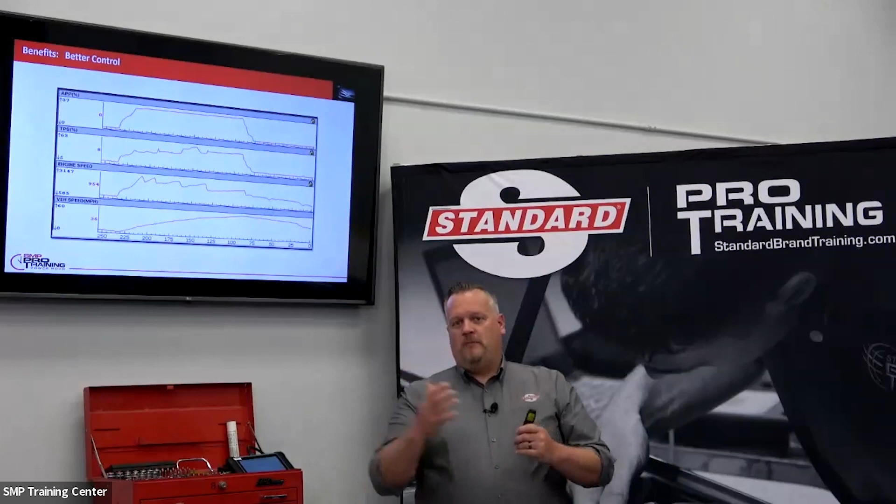One of the benefits here is actually better control of the vehicle. I've got a Buick Encore here with me. We're going to be looking at a case study and diagnosing it here. But engineers for years and years have wanted to get better control of the vehicle, and one method here is through electronic throttle control.

If we look at the scan data up on the screen here, you'll see the top line is the APP, the accelerator pedal position sensor. This is the driver's input, the driver request. If you look at that scan data, you can see that it plateaus, it goes to 100%. This means the driver is, for all intents and purposes, flooring it, pushing their foot all the way to the floor. They want to go fast.

The second line shows the actual throttle position. On old mechanical vehicles, if your foot was to the floor, it meant the throttle blade was wide open. But with today's drive-by-wire systems, the PCM or control module is ultimately in control and gradually ramps up, giving the engine as much air as it needs there. That's just one example of better control.

Another example here is component reduction. Think specifically about cruise control. We no longer have to have a standalone servo, we don't need cables - it's really kind of a thing in the past. Engineers were able to reduce the amount of components required on a vehicle by incorporating it all into the electronic throttle control system.

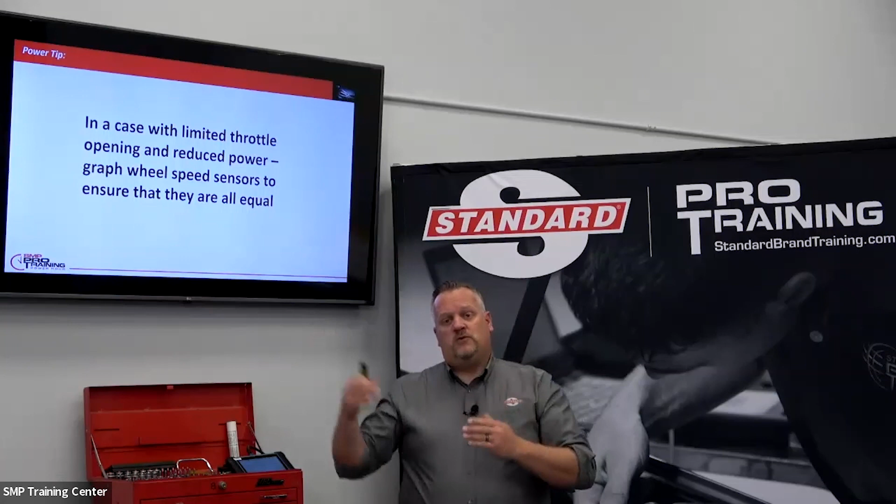So if you run into a situation like this, graph out and monitor all four wheel speed sensors. The examples I've seen, one wheel speed sensor will drop out, and the PCM thinks that wheel is slipping or locked up or lagging behind. So it's going to reduce the amount of engine torque via the throttle command and reduce the power to the wheels. Make sure that you're verifying that all four wheel speed sensors are in fact producing the same type of output. Another benefit here is reducing emissions.

That's all the rage, right? And it has been, at least in my 40 plus years of life here. Manufacturers are continuing to look at how to clean up the tailpipe emissions through catalytic converters.

But now with electronic throttle control, engineers can help get that catalytic converter lit off and working properly much quicker by controlling or choking off the airflow. Remember in the old days of carbureted vehicles, there was a choke device, which limited the amount of airflow and created a different air-fuel mixture. Engineers are doing a lot of the same stuff now with electronic throttle control. They can control the amount of fuel going to the engine via the injectors, but they can also choke off and control the engine via the electronic throttle control to help that catalytic converter work much earlier in the drive cycle and clean up that tailpipe.

Then another benefit here is eliminating pumping losses. If you're not familiar with the term, let me explain. In a four-stroke engine, the pistons go up and down throughout all four strokes. Think about the intake stroke - the piston starts at the top and is drawn down by the crankshaft.

As it's coming down, it's pulling air in through the intake valve, drawing it in to fill the cylinder. The air is going to produce a vacuum because in most cases we've got a throttle blade at the beginning of the system, which is going to be closed in many cases, and it's going to create a vacuum. This vacuum actually reduces horsepower, or creates a drag on the crankshaft, resulting in what's referred to as a pumping loss - any type of inefficiency affecting the pumping of the engine. That's why diesel engines are much more efficient in many aspects, because a lot of them don't have throttle plates. Some newer ones do for emissions purposes, but they default to the open position. So those engines breathe much freer and easier due to no pumping losses.

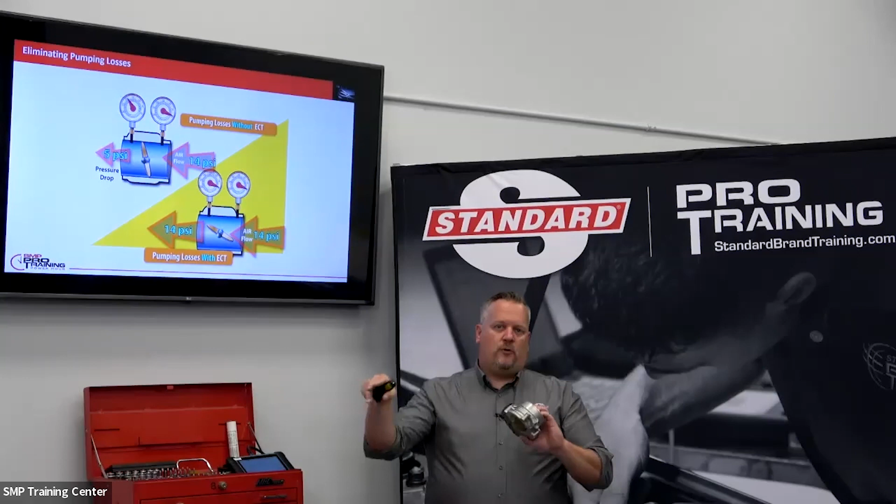So where am I going with that? Engineers today with electronic throttle control can use it to their advantage. Recently I was driving a 2.7 liter Chevy Silverado, a full-size truck with a little four-cylinder. Of course it's got a turbo, VVT, a lot of different technologies incorporated into it. It was amazing to see that as the truck was driving at a steady speed down the road at 55 miles an hour, the throttle blade was commanded almost completely open. The engine RPM was being controlled via cam timing, ignition timing, injection amount, and all these other technologies in sync with the electronic throttle control system to help that vehicle breathe easy and run as efficiently as possible. We couldn't do this with an old mechanical throttle cable style system.

Here's another one that, for those of you working on cars in the 90s, this was commonly referred to in the shops I worked at as morning sickness. This is a scenario with a customer, predominantly with a GM 4.3 liter - think of an Astro, Chevy S10, Blazer, something along those lines. They would come in and say, first thing in the morning, man, I really got to stomp on the throttle to get the vehicle to move. As the day goes on, it seems to get better.

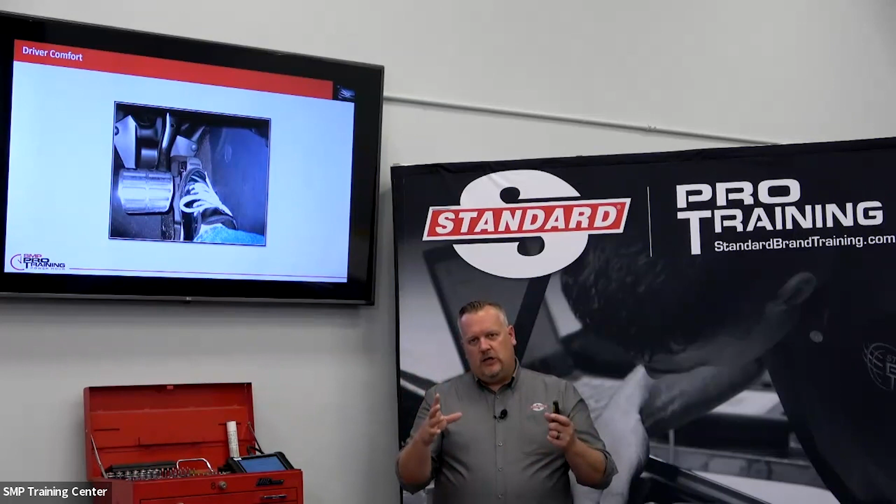Well, that was because of carbon buildup on the throttle blade inside the throttle body itself. After the vehicle sat all night, that carbon would harden up. So the driver would press on the throttle - and it's pulling on a cable, a mechanical device at this point - they'd have to put in extra effort to break that thing free. Now as the engine warmed up and the day went on, that carbon would turn into somewhat of a goo, or more of a liquid form, and it would be much easier to actuate the throttle. Well, today's electronic drive-by-wire systems have the driver simply pressing against a spring, so they're not doing a whole lot of mechanical work. The driver experience is much more comfortable today than it was previously.

Another one is, as we look at newer technologies, they've been significantly enabled due to electronic throttle control here.

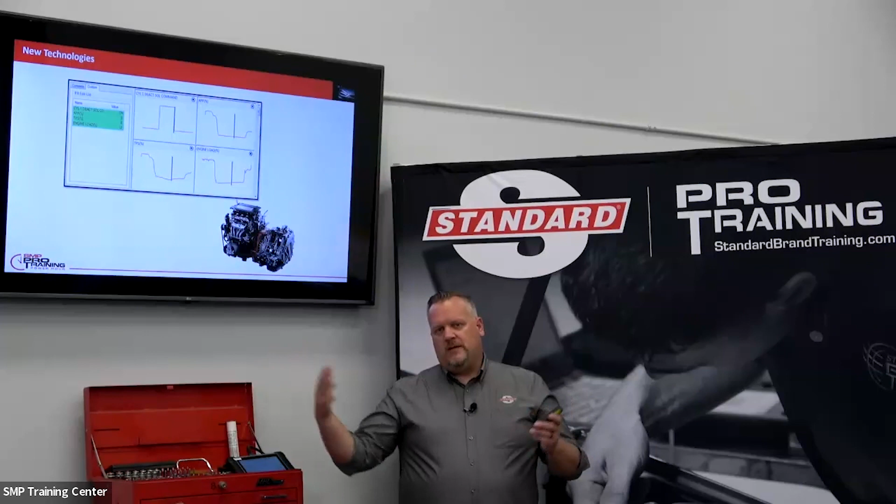So if you look at the scan data displayed on the screen, you're going to see an example of a vehicle with displacement on demand. You may remember some of the old Cadillac systems that would drop different cylinders strategically, and that was not a raging success. Today's vehicles quite often go from, say, 8 cylinders to 4 cylinders with displacement on demand. With electronic throttle control, the PCM knows when it's going to disable these multiple cylinders, and it compensates for the adjustment in airflow via the electronic throttle control system. It really helps complement that, and if you've driven any of those modern vehicles with a displacement on demand system, it's really a seamless transition, whereas it wasn't necessarily so seamless in the older Cadillac test phases.

We've also got an image of a hybrid engine there. Really, hybrid technology would not be possible without the use of electronic throttle control. It's very seamless in many cases when it goes from electric power to internal combustion engine and transforms back and forth. With electronic throttle control, the driver presses on an input device, the APP, and makes the request, but the PCM is ultimately controlling the internal combustion engine torque output via the throttle body. So it's really been a huge motivating factor for a lot of newer technologies.

So let's look at the system as a whole. We've got the accelerator pedal position here, and this is the driver input - how fast do you want to go? And maybe a dangerous question to ask some people, like my assistant, Ricky Bobby, here in the studio today. But this is the input from the driver, pressing down on the throttle, making the request to the control module.

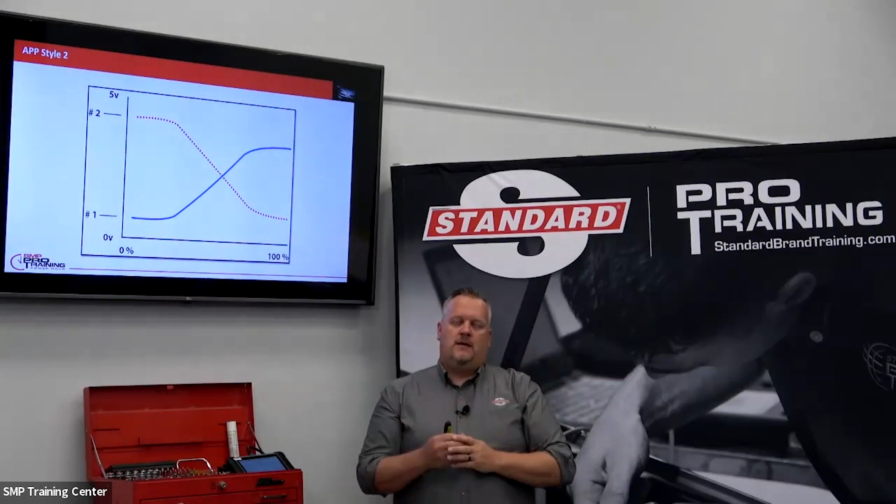I verified this on a 2023 Chevy Traverse just last week, and yesterday on a Nissan Pathfinder, still really using the same type of strategy, many cases on the APP as well as on the TP sensors.

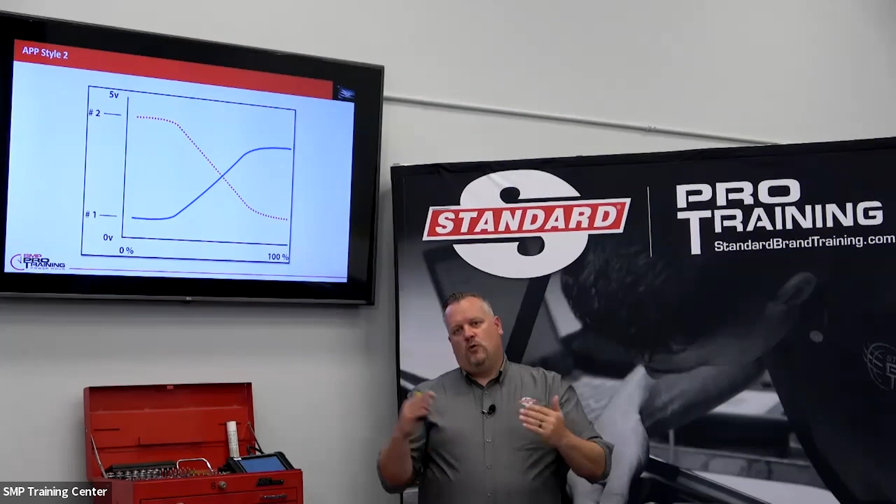Now, it's not always going to be this way, so I always ask you to understand your own known good and look up service information. Manufacturers do a fantastic job of giving you the specs as to what these should look like, but this is just a casual observation through my own personal experiences.

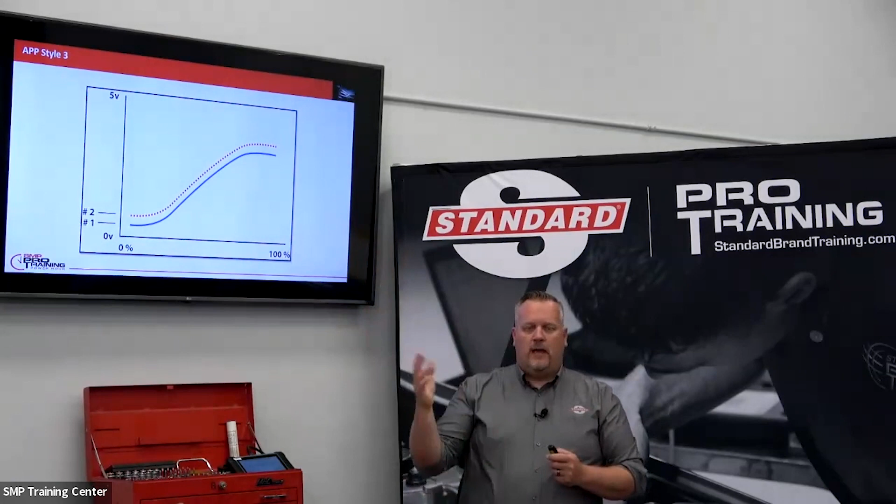There is another style, such as this one, in which both signals start low and work their way high as we sweep through the throttle. But notice how they're offset. Again, the control module or the engineers need to know these are not shorted together, so they're both starting low and working their way high, just offset from each other.

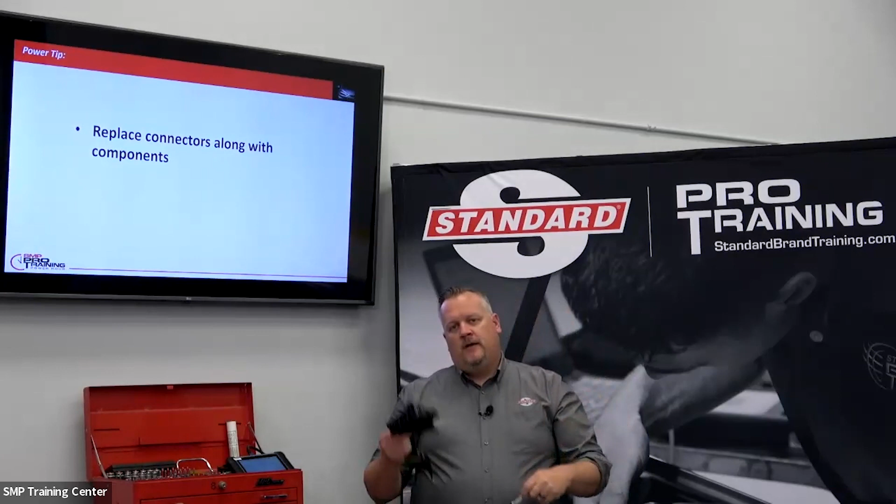That brings me to another little power tip. If you're going to replace one of these components, it's very important to pay special attention to the electrical connector that goes with it. If I'm climbing underneath the dash to replace this thing, in many cases I'm going to always recommend to the customer that we're replacing the connector along with it.

These things are inside the vehicle, but think about how close they are to the driver's feet. If you're in a rainy situation or in the north country where people are tromping through snow, remember they're putting their feet here. The floor is going to be wet, and you're going to have a lot of humidity in this area.

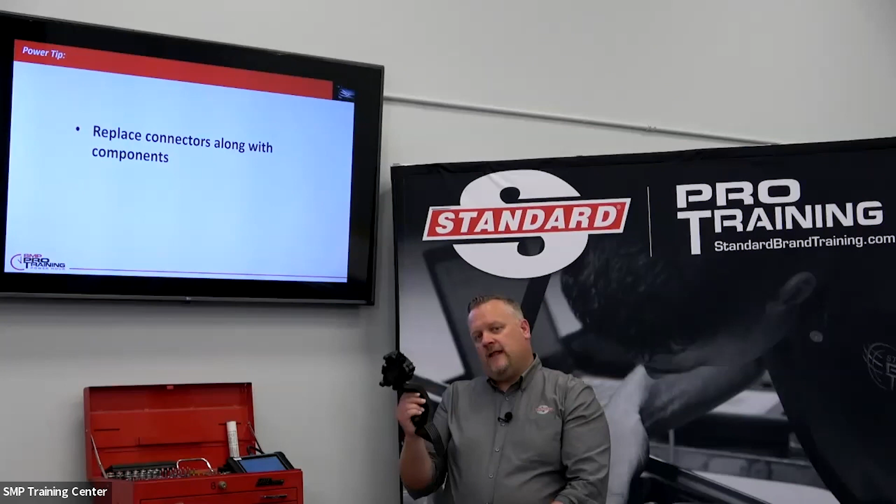Quite often we'll see terminal tension get relaxed or even what's referred to as fretting. Sometimes even a technician unplugging and plugging this back in will create a different type of connection and somehow actually fix the condition. We hate to fix a customer's car by simply unplugging and plugging something in. We want to make sure it's going to be a fix that lasts.

So if we're going to replace the APP, many times I'm going to recommend replacing the connector along with it. Otherwise, I'm going to recommend using a product such as this. You might be familiar with Stabilant 22A. This stuff is definitely worth its weight in gold, literally, but it's a contact enhancer.

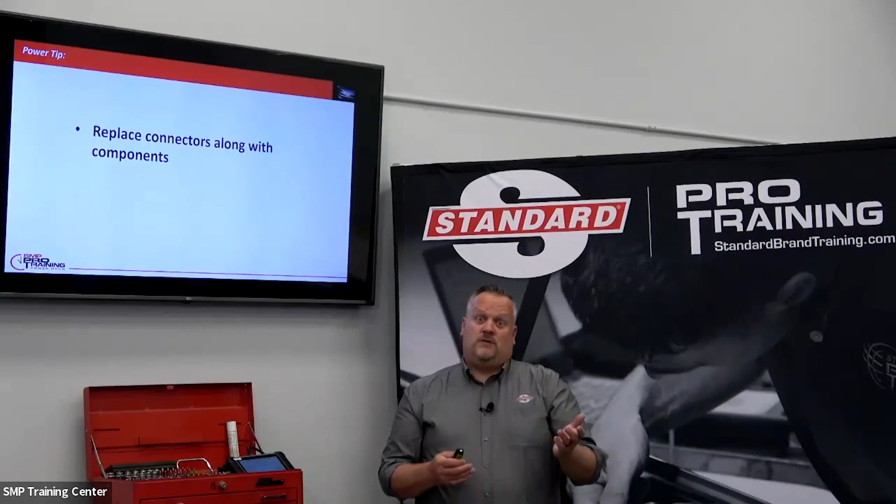If I can't get a connector or the customer doesn't agree to it, many times I'm going to put a few drops of the contact enhancer on here to help make a better connection. We certainly don't want to sell a customer a component and have them come back a week or a month later saying it's doing the same thing again. Never a good scenario. Now, if we look at the throttle body assembly itself, we've got a reversible brush DC motor.

Our engineering test facility is on the other side of the wall from the studio here. I walked out and grabbed a couple samples that they had sitting out there, that they were installing on vehicles and doing some tests with.

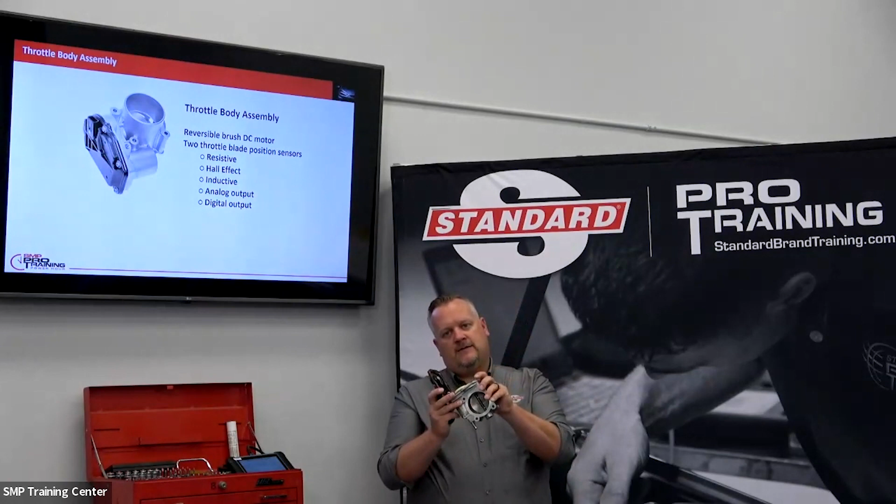If I remove the gear here, there's a little reversible DC motor. Power and ground are applied to move it one direction, and it's reversed via the control module to drive it in the other direction. Then there's a set of gears here, kind of a gear reduction setup, and the gears drive and go to the throttle blade itself. The throttle blade itself has a spring acting on it to return it back to the default position.

Inside, and you'll see actually in the cover here, this is a new Hall effect design TPS sensor. So there's multiple throttle position sensors here. Doesn't necessarily look like it, but there's different magnets inside of the throttle shaft, acting across the Hall effect sensor, resulting in the output to the control module.

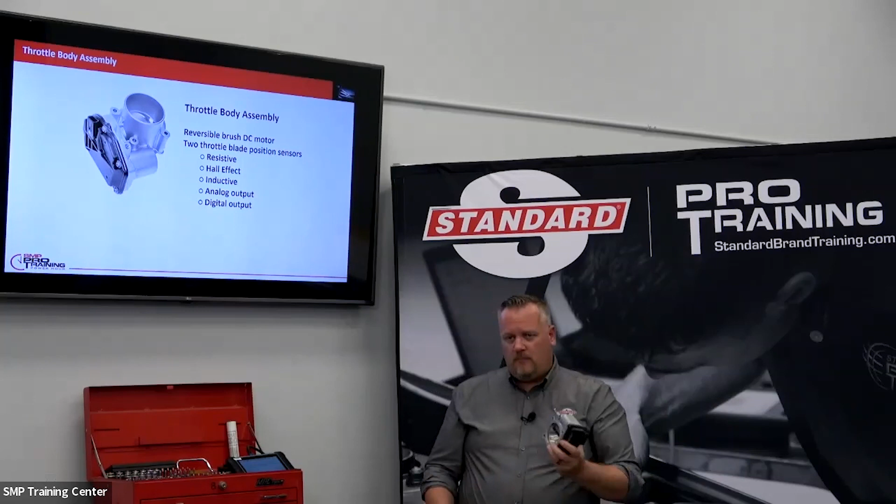If we look at these, we'll see kind of the default position. And if you've ever touched one of these or opened them up, you'll notice it doesn't just always go to the closed position - it's going to default to about the 7 to 12 degree range there.

If you drove a vehicle with a throttle body unplugged, it's going to run about 1,500 to 2,000 RPM. In some cases, in the name of research, I've even driven a vehicle around the block with a throttle body unplugged, and it drove surprisingly well because we're getting some air through here, but the RPMs can be controlled via cam timing, turbo, injection quantity, amount, etc. So we're getting some accelerations and decelerations, even though the throttle body was left in its original 7 to 12 degree range there.

So now if we start the vehicle up and the vehicle is idling, the control module is going to adjust the placement of the blade. And it's not always going to be the same - there's going to be different loads. Let's say AC system is on, it's a hot day, it's a cold day, whatever - we're going to see some changes there. So it's going to be continuously adjusting it.

That brings up another point here - we need to make sure that the throttle body is clean, and we also need to make sure that the idle position has been properly learned. I'll talk about some tips on that in a little bit, but the idle position is crucial to good drivability or customer concern.

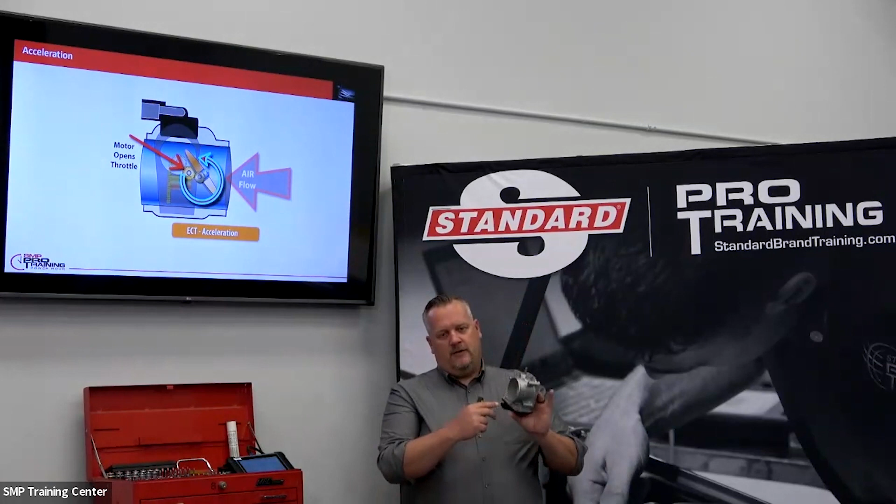Now if the vehicle is going to accelerate, the command is going to be given, power and ground will be applied to that motor. It's going to drive the throttle blade open in one direction, and then obviously it's going to go in the other direction to close it.

That brings me up another tip here - you can see I'm actuating or moving the throttle blade here myself. Obviously this is in my hand, it's not on the vehicle. That's one of my cautionary tales here to you as a technician. When you're working on these things, it's tempting to just do it on the vehicle. I'm always going to recommend to remove it from the vehicle and do any actuation or any cleaning of it.

For one, if you get it off the vehicle, you can access the backside, clean it much better. It's never really recommended to spray cleaner into here because it could wick through the shaft, actually short out the motor or the sensors inside of here. So it's good practice to remove it from the vehicle.

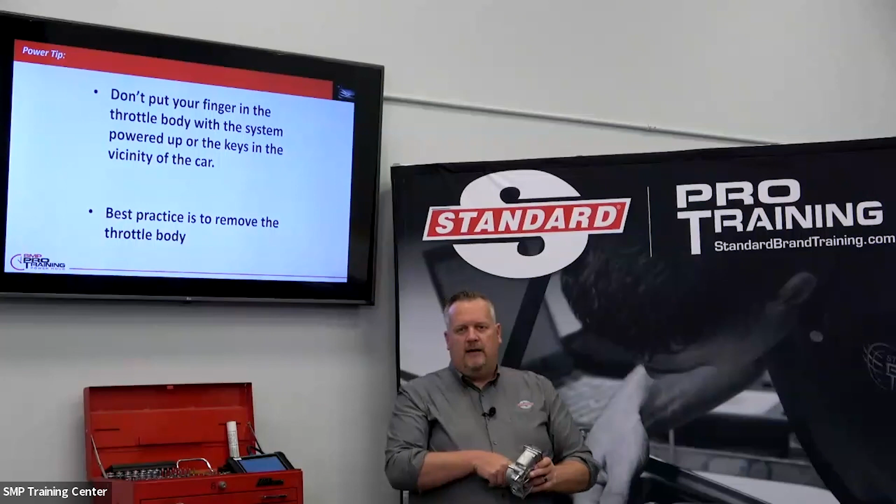And now you're safe, right? If I put my fingers in there and the vehicle powers up somehow, or somebody's got a remote somewhere - I've had one finger sewn on at one time in my life. I really don't want to do it again by having a throttle body do some damage here. So safety first with this.

That's another thing as we're testing and getting into newer technologies, we have to understand what known good is, have a good library, have a good network of friends to reference or contact, or ask hey, can you share a known good pattern of this, before falling down this path and actually replacing multiple components that are working properly, completely fine.

So another little tip here, I hear this from some technicians too. Remember back in the days before drive-by-wire, you could pop the hood, actuate the throttle yourself, rev it up, grab the throttle, do all that stuff, or press the pedal and you were ultimately in control of it. Well, remember in drive-by-wire systems now, we're not really in control of this anymore. The control module is the one that's in control of this.

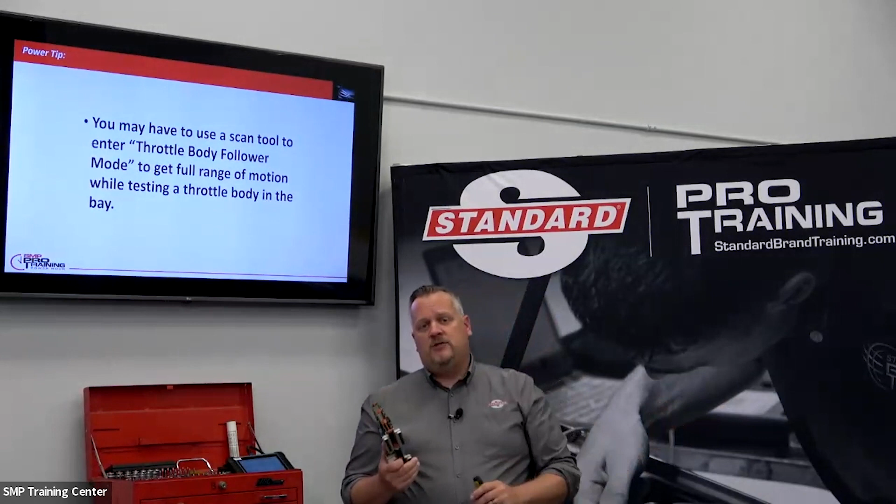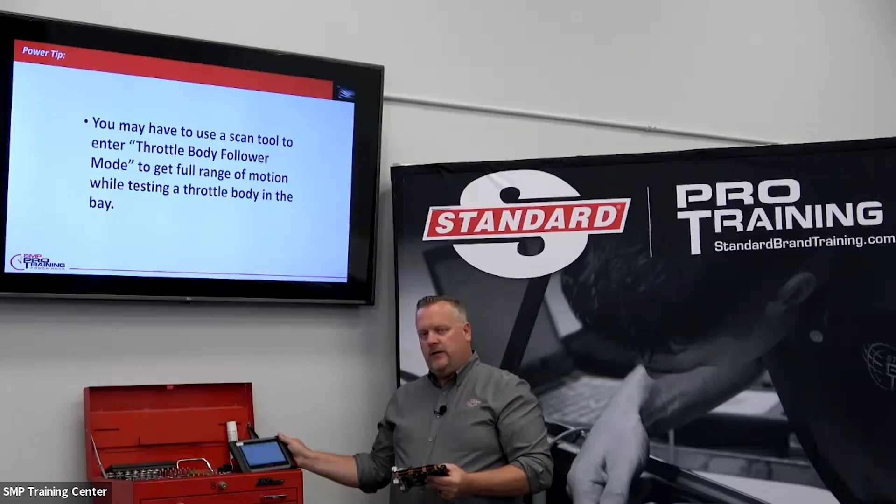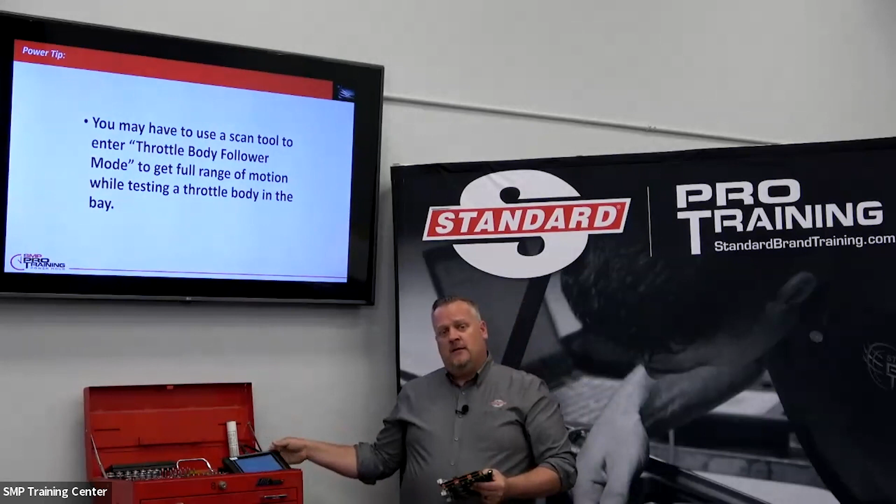So in the Buick, I've got it sitting in the bay here. If it was running, or if it's just sitting here key on engine off, and I step on the pedal, it's going to be limited throttle actuation. So in order to do a complete test, many times I'm going to have to grab my scan tool, and there's going to be a throttle body follower mode or a throttle actuation test under special functions or active tests, which I'll need to enter. That's going to control that throttle blade much better. So be aware of that.

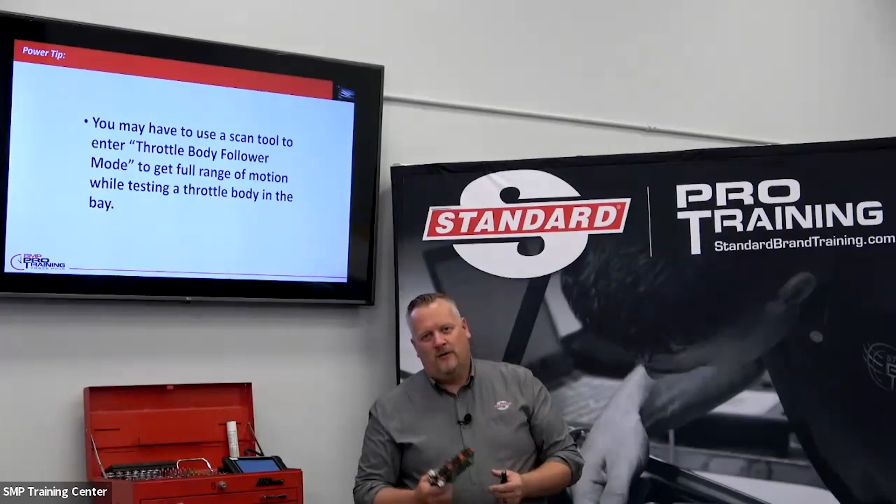Just because you're doing a key on engine off, foot to the floor, and the throttle body moves like 30 degrees, that's normal in many situations. So don't replace the throttle body at that point. Take a look at your scan tool and see what type of output tests are available there.

Next up is the torque manager, really the brains of the operation here. As mentioned, we're receiving inputs from many different systems, looking at different pieces and different styles. This is the one that actually makes the command to the throttle body and says, okay, do this, don't do that. And then ultimately the engine's going to generate torque and apply it to the wheels.

A couple little tips here. GM failure modes include some acceleration limiting or limited throttle. These are different modes in which the vehicle will operate. And this is one of the frustrating things for technicians as we're working on these, I can remember when I was a technician at the shop, we were fighting an intermittent problem.

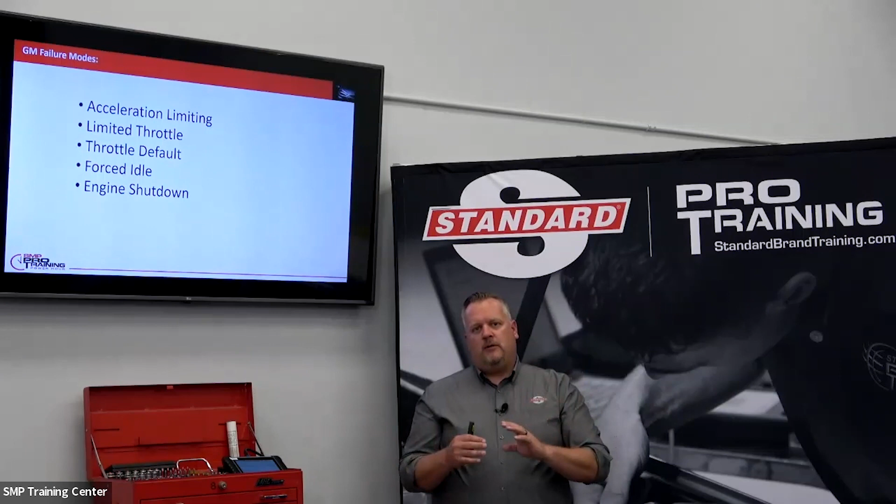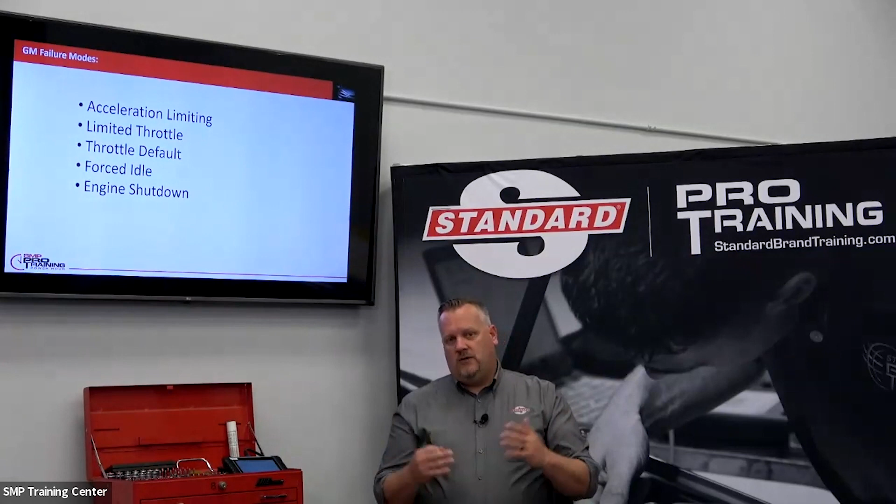So there would be force idle or engine shutdown mode, and we would get into force idle mode and the customer would say, it's doing it right now. Well, no, really the problem happened 5 miles ago. You're in one of these various shutdown modes here. So the symptom or the problem really only happened for a couple tenths of a second, but now it's not actually really occurring, or you're seeing the fallouts from it.

A couple scan data PIDs here that working on GMs, I always encourage looking at: APP 1 and 2, make sure it agrees. TP 1 and 2, make sure that agrees. TAC communication, understanding that and taking a look at it. Throttle body airflow compensation, we want to understand what this data PID is doing and how it's actually working. So we need to take a look at this. Throttle body idle airflow compensation is a very important PID.

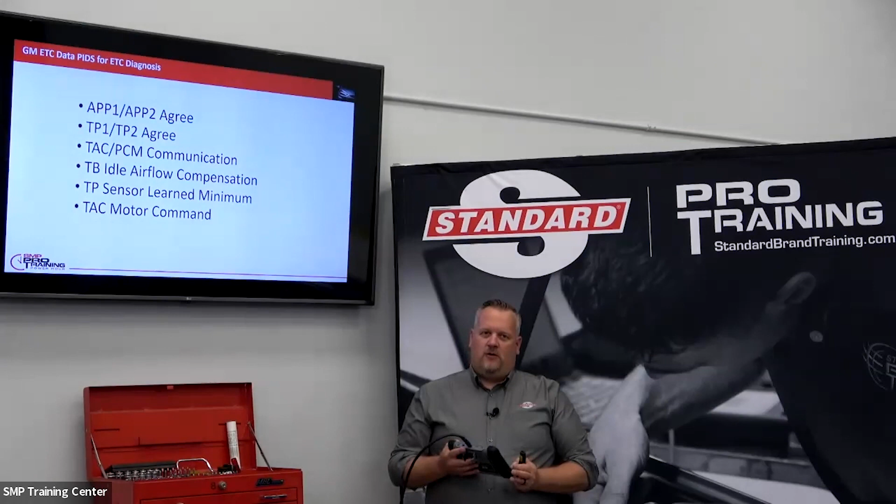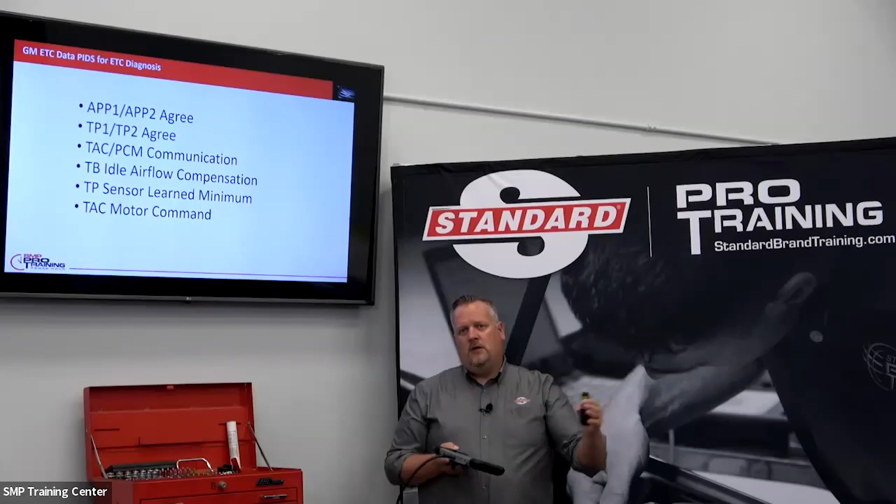As that throttle body starts to get contaminated and dirty, it's going to have to open further and further, moving up more and more. That's a great technician tip. If that number is significantly increased from what you're used to seeing, like 35, 40%, that means you've got a dirty throttle body or a worn out throttle body, it's having to work a little harder. TP sensor learn minimum, that's going to change when you do the relearn process with your scan tool. We need to understand what a known good, or the learned value, is and how it stays there.

Throttle actuator motor command, and that's a very important tip on General Motors vehicles. If I look at it here on this particular Buick in the studio with me, I'm not going to see anything because it's in key on engine off mode right now.

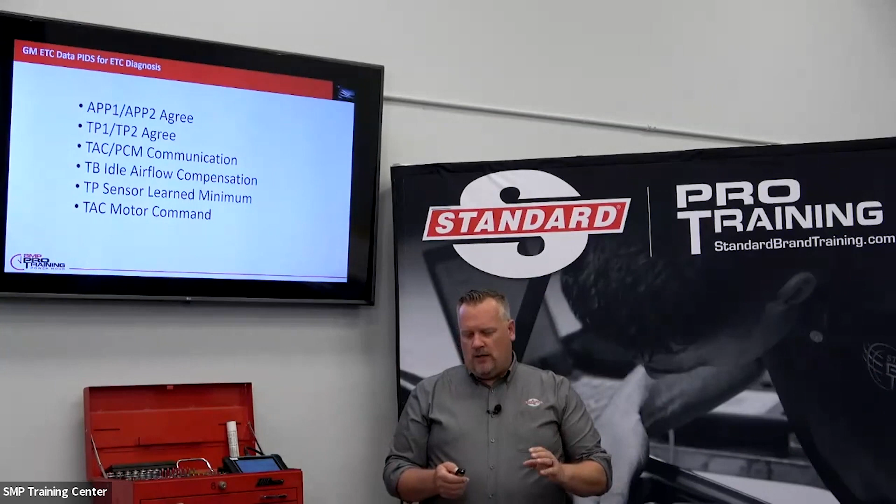Again, experience tells us this. Imagine if you're a scope guy and you put a current probe on the motor side of a throttle body - that's really what this data PID is doing for us. So even with the vehicle at idle running in the bay, it's going to be doing some type of compensation at all times, and that motor is going to be putting in some work.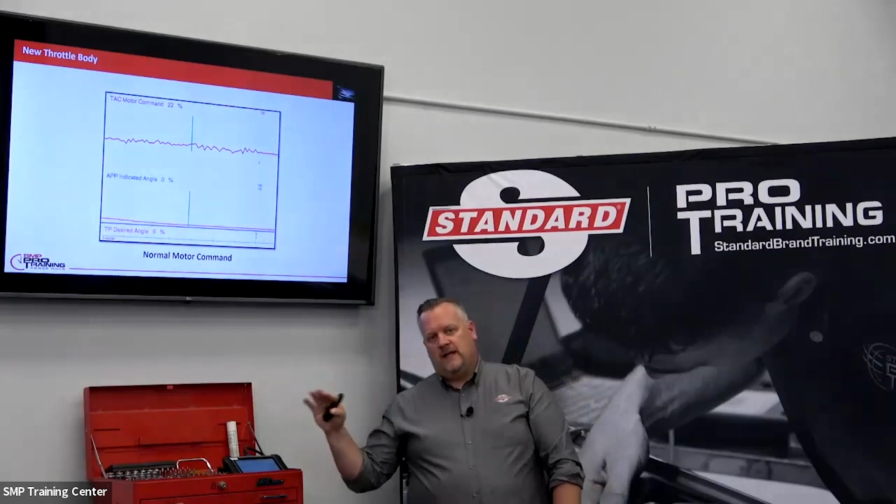So as a combination of some buildup but also worn teeth - remember I showed you those gears in there are doing some additional work - that's a result of this. So next time you're working on a GM electronic throttle controlled vehicle, I'm going to encourage you to look at that TAC motor command data PID.

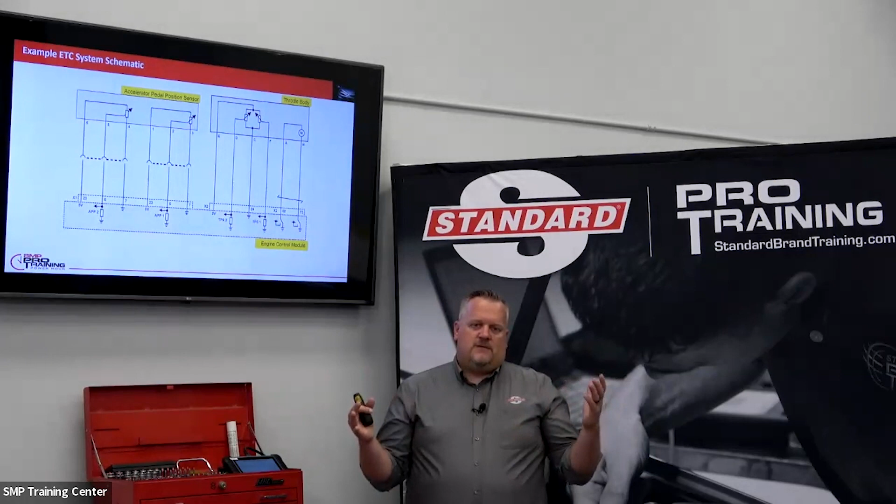So let's look at some diagnosis here. Really these systems are relatively simple. Yes, they're frustrating and a lot of stuff happens in a millisecond that puts the vehicle into FMEM or some type of failure mode, but really it can be broken into three systems. I've talked about APPs, control modules, and the throttle body itself. The codes are very much similar to that as well.

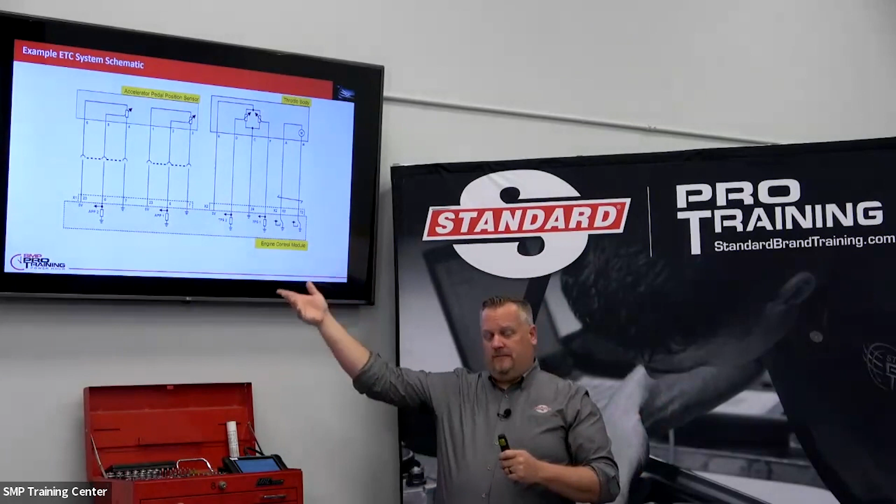As I look at the schematic on the screen here, you can see the APP signal - we've got the multiple APPs there. Same thing on the throttle body: we've got the motor command here, which will be reverse polarity to drive it one way or the other. Then we've also got the two throttle position sensors there, all as inputs or outputs from the engine control module.

So many times when a technician gets a throttle position code, there's not a whole lot of reason to pay attention to the APP system at this point. Follow where the trouble codes lead you down the path here.

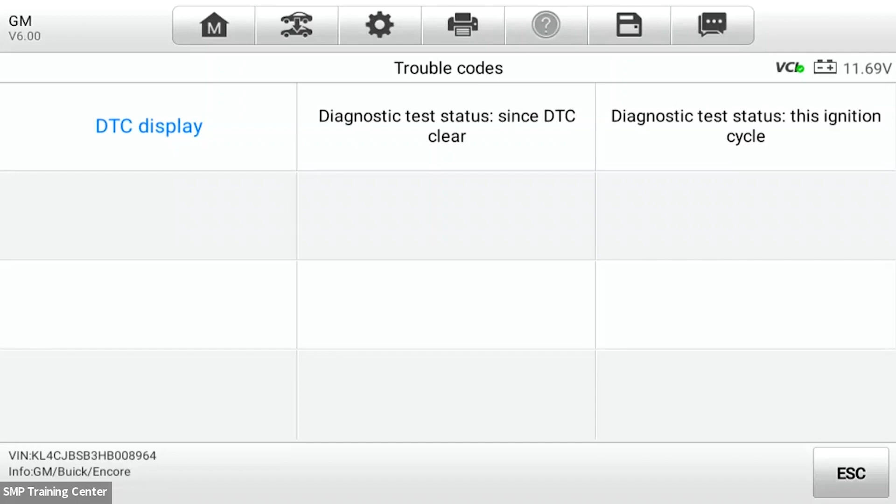So in the example here, let me pull up the scan tool. I've got it plugged into our Buick. As we take a look at it, I'm going to pull up the DTCs or trouble codes that were set with this. Now keep in mind, we do a lot of hands-on training here at our training center in Texas. We've got our engineering test lab right outside, and a lot of people are poking and prodding at our vehicles here, and stuff happens.

So if we look at the scan data here, you can see I've got throttle position sensor 1 circuit low voltage. I've also got a code for throttle closed position performance, and then a code for throttle position sensors 1 and 2 not plausible. Now which one of these makes the most sense to follow? Well, I'm not too worried about throttle position sensor 2 because I've got another code that points to TP1.

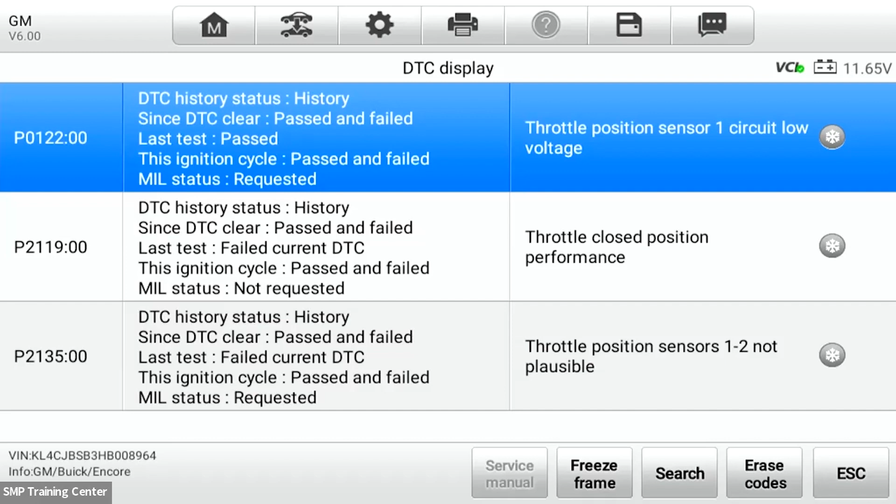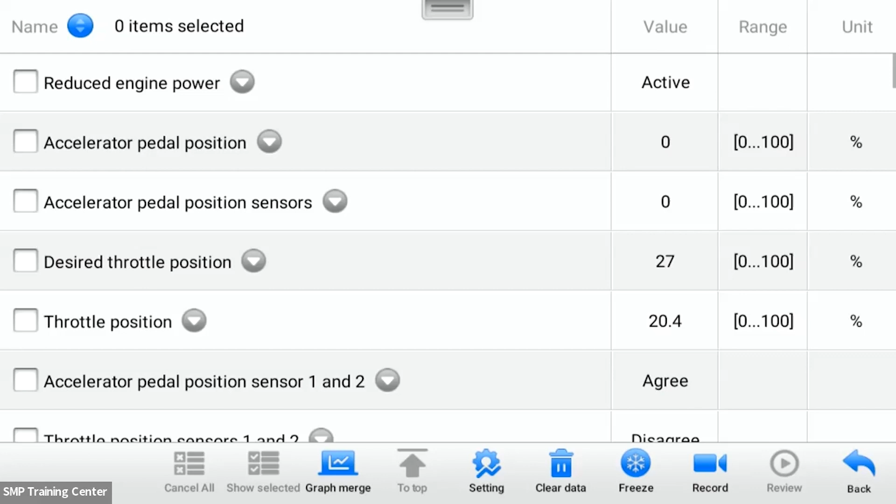So if I back out of this, I can look at scan data. Let me pull that up here a second. I know we're running somewhat short on time, but I want to get through some of this and show you just some of the data available to us on the throttle side. So you can see reduced engine power - again the vehicle's key on, engine off, sitting here in the bay. A lot of stuff will be at zero, but you'll see some of these agree and disagree. Oh, look at that - my 1 and 2 disagree. Now I can look at my voltages and run through some of this.

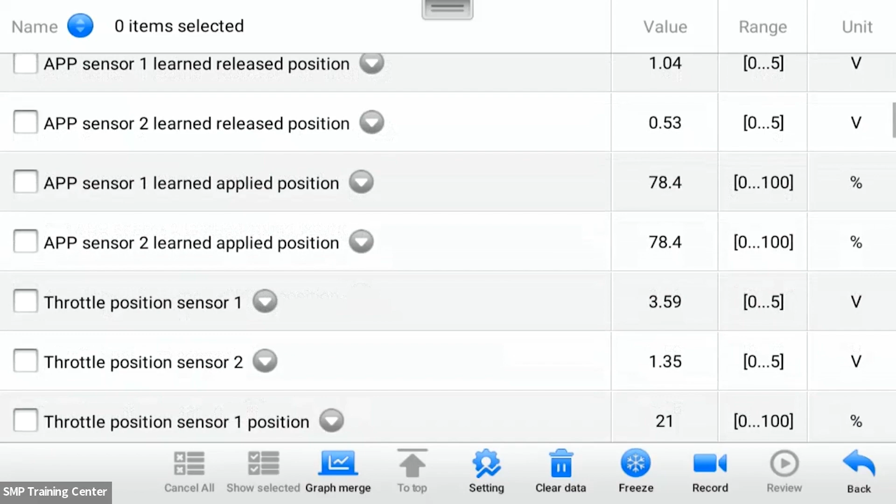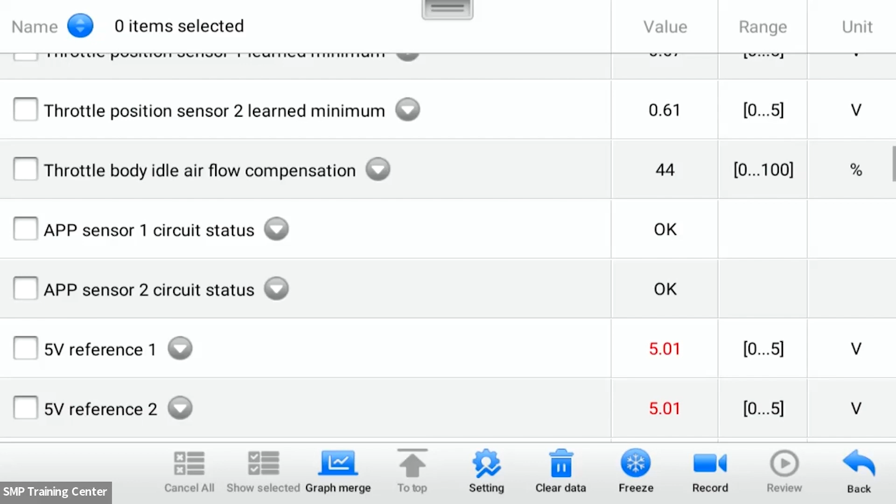My learned minimum, my throttle body idle airflow compensation percentage, it's 44%. The vehicle's not running right now. That is higher than I like to see on many of these. Throttle system performance tests, MAP, mass airflow, force engine shutdown.

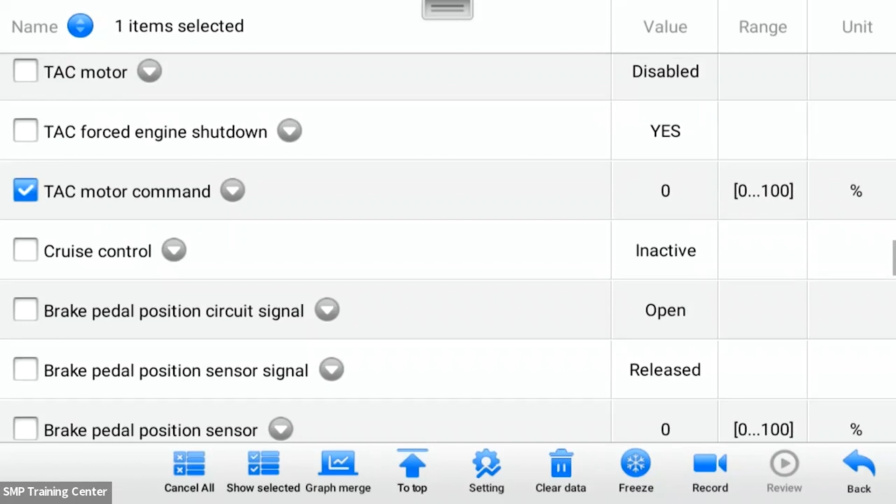So we've got a true problem here with this idle engine speed, TAC motor command. Right now it's showing zero simply because the engine is not running. But again, based on this information, my trouble codes are talking about throttle position. So am I going to go underneath the dash and lay on the grimy floor and worry about the APP? I'm not. I'm going to simply focus on the throttle body or the throttle signals here.

And so I'm suspecting we might have something going on. The PCM is solid mounted to the vehicle itself, and then the engine is going to be rocking via the motor mounts. And so sometimes we see that manipulation of the harness itself.

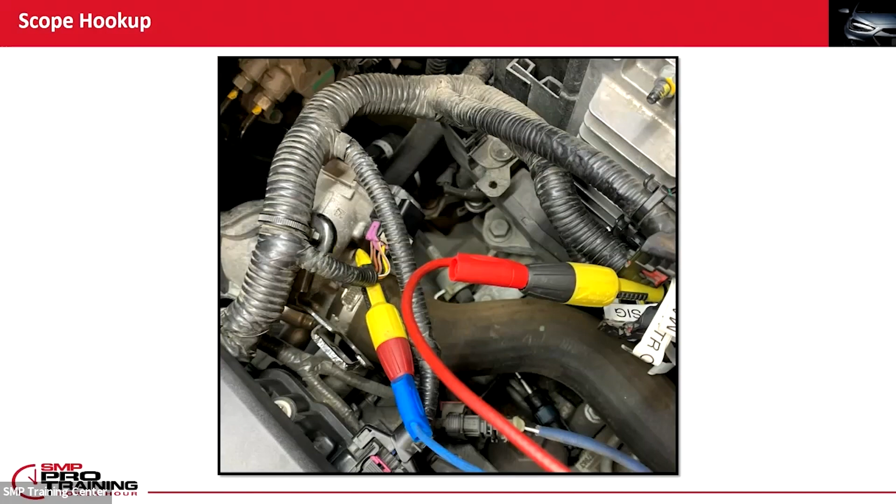So if we take a look at this slide here, I just grabbed a quick snapshot so you can see closely where my scope connections are. And again, guilty as charged, you can see I'm using some probing connections here. So I am piercing the wires slightly. And if that's done enough times on the same vehicle, we could result in a problem here.

So let me take a look at the scope here. So again, I've got the lab scope hooked up. I'm looking at Pico. I've got channel 1 connected at the throttle body, and I've got channel 2 connected here at the PCM. And so you look here, my voltages are, or my scales are 0 to 5 volt. On the left is the blue, and on the right is the red.

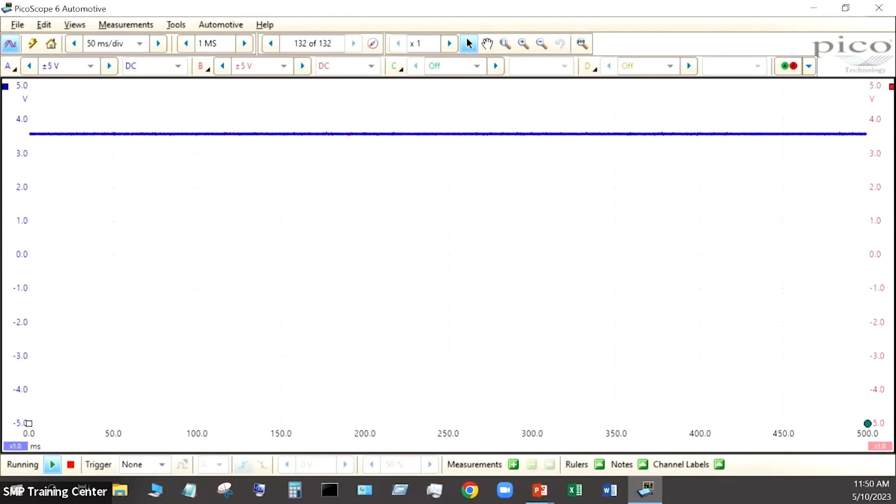And so this should be the exact same, but look at how that signal is wavering here. I'm looking at the exact same circuit. It's not like I'm looking at TP1, TP2, I'm looking at the same thing, and look at how that signal disappears. All of a sudden now it's perfectly matching. It is right in line. See, it's even hidden behind.

Now it drops out. And so as I touch this harness, all I have to do is touch it or give it a little bit of a wiggle. Look at how the signal is dropping off as it's returning to the PCM. And so I think I've just verified that this is truly a wiring issue here.

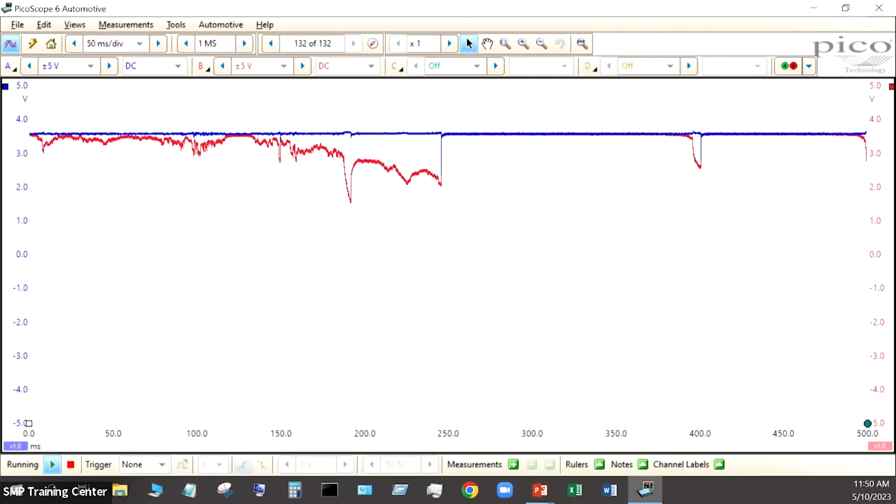Let's do it right. So here's some important steps for you as technicians as you're diagnosing these systems. First off, we always need to verify the customer concern. Customer brings their vehicle not because they're sick of it being at home and it's a great inconvenience for them. There's a problem, right? They bring the vehicle to you. We need to verify that it is doing what the customer said it's doing.

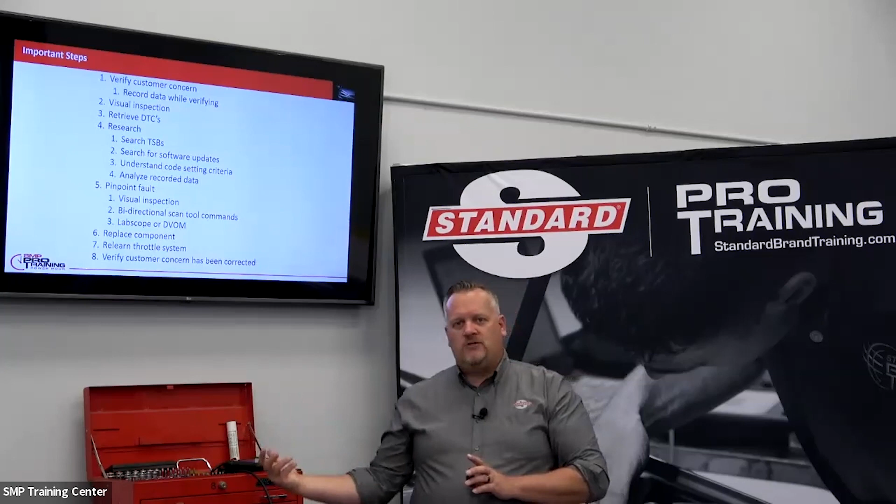But it's important to take your scan tool with you and record the data while you're test driving it. It's sometimes hard to focus on this stuff. Sometimes we need to trim out some different data PIDs, but we want to record it. No sense in going, oh yeah, the car acts up, I caught it, but did you catch it? If you don't have a scan tool recording data, did you catch it?

Next, we're going to bring it back into the shop. We're going to do a visual inspection. That's what really led me on this path. I'm like, somebody's pulled some of the covers off here. I can see where somebody's been here before. That might be the direction I'm looking at here.

Now we're going to pull DTCs. In this one, we had throttle related trouble codes. I don't care so much about the APP. It could be a module processing issue yet, but right now the codes are pointing me towards the throttle side of the equation. That's where I'm going to spend my time.

Now we're going to do some research. I want to see if there's any technical service bulletins. Is this a common issue? Is there any software updates? And do we need to fix it with a reflash? Many vehicles in my career I've fixed with software updates there.

You need to understand the code setting criteria. What conditions does it have to be in to make the trouble code set? So if I couldn't verify it, how do I test in those same conditions there?

Now is when I'm going to analyze my recorded data. Did I find the fault in my data? Sitting behind a desk at your workstation is much more easy to analyze it than trying to drive down the road and keep an eye on things.

Now I've got a game plan together, such as here, I got the wire schematic together. I understood the conditions. I understood the trouble code. I had a pretty good game plan before I really popped the hood and started digging in here.

This is where I decided, all right, I'm gonna hook my lab scope here. Maybe you don't have a lab scope. You can try it with a DVOM. A lot of these things happen so quickly, I'm not sure if the meters are going to catch it there. With a test light only, you might be a little bit more of a struggle there. But if you've been thinking about buying a lab scope, this might be the excuse to nudge you there to learn that art or that craft.

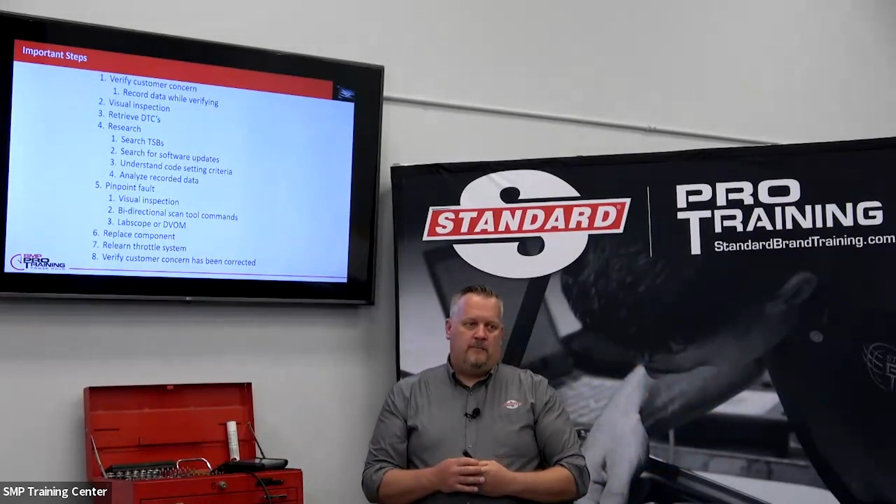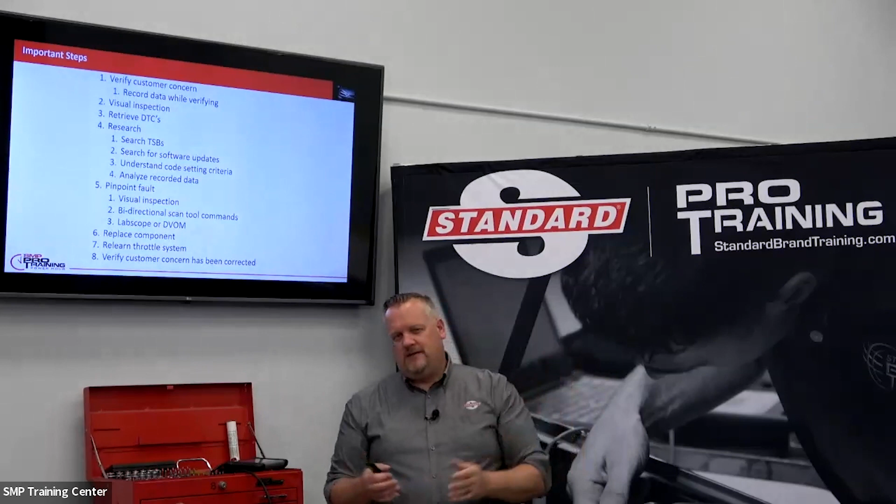And then we want to make sure that the problem's been solved, right? Customers are trading us their hard-earned money for us removing the pain from them. The pain here was the check engine light was on, the vehicle going to reduced power mode. And so if I'm going to take compensation for repairing something, we want to verify it. We want to make sure that it's been done properly. So we feel confident in giving it back to the customer, and we're not going to get a repeat phone call for the same problem very soon.